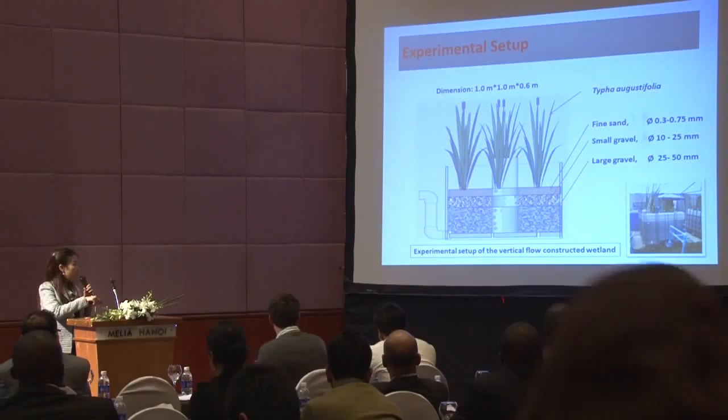This shows the experimental setup we have at AIT. We use plastic tanks, 1 meter by 1 meter, with about 60 centimeters of media. Inside the system, we put probes to measure DO concentration, pH, and ORP to monitor fluctuations in real time after feeding. From each layer, we also measure the percolate that passes through sand, small gravel, and large gravel at the bottom to see the fluctuation of each parameter.

This shows the sampling points and the points where we placed the probes to measure DO, ORP, and pH inside the system.

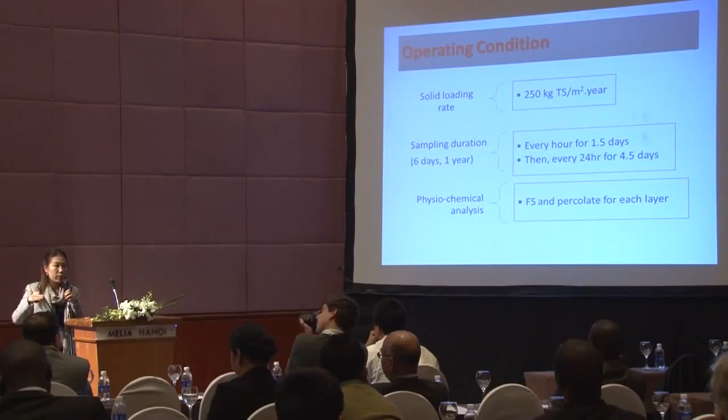For the operating conditions, we used 250 kilograms TS per square meter per year when feeding the system. After feeding, we took samples every hour for 1.5 days to observe nitrogen transformation, then measured daily until at least the 6th day of operation. We also measured parameters to calculate nitrogen transformation inside the system.

Organic nitrogen changes to ammonia by ammonification, which is about 4%. After that, ammonia also can change to nitrite and nitrate, about 3%. Then the remaining also can fall down to the bottom part, which is the gravel layer.

And also more or less the same, ammonification, nitrification, and also denitrification still can occur at the bottom parts, but maybe at a different percentage. Then for the remaining of all the nitrogen forms, it will fall out with the percolate. The overall process will take about 6 days because we feed once a week.

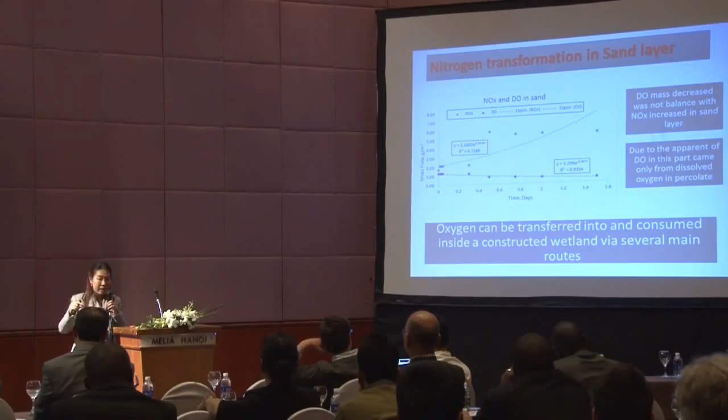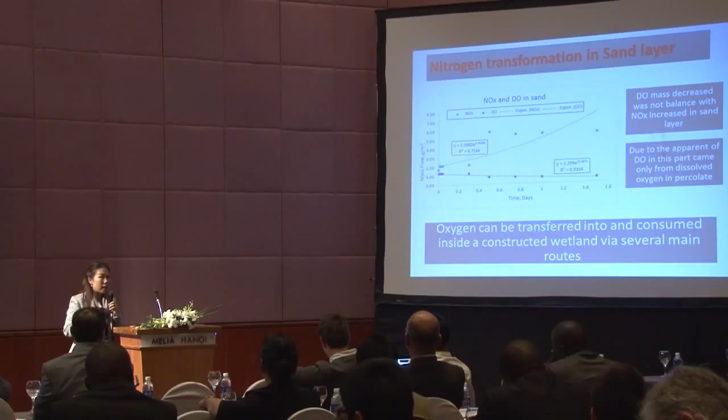If we compare the occurrence of nitrites and nitrates in the sand layer together with the DO concentration, we found that it's still not quite balanced, because from my hypothesis at first, I thought if we know the DO concentration, it may balance with the occurrence of nitrites and nitrates in the system. But after we measured, we found that the occurrence of nitrites and nitrates in the system is still higher than the concentration we can measure, about 2 to 3 times.

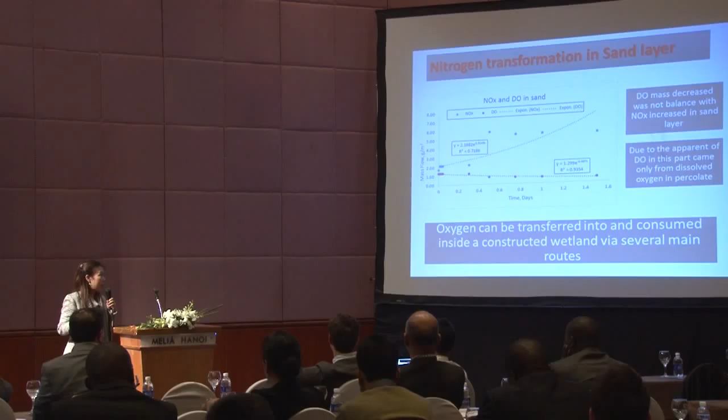This means that oxygen in the system may come from other sources, like from the plant root, and also can come from the air. This could be a topic for further study.

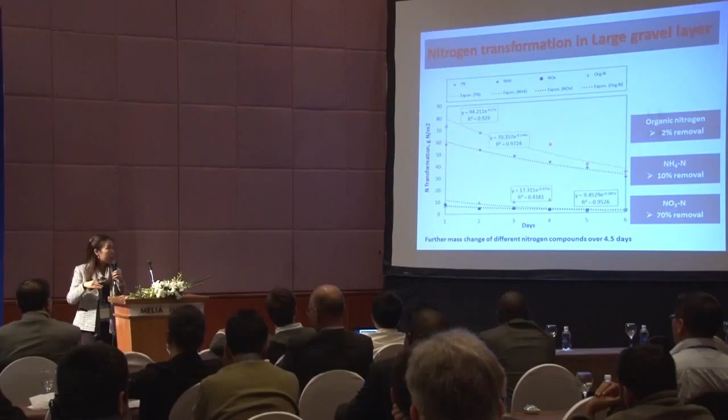For the small gravel layer, it's also more or less the same, but with not much reaction as in the sand layer. Just 2% of organic is removed at this level, and also 10% of ammonia is removed. The occurrence of nitrite and nitrate is also removed here under the denitrification reaction. Also for the bottom gravel layer, the remaining of every form is also removed here.

I would like to come to the conclusion. For the upper part, ammonia can transform by nitrification under aerobic condition, which we can confirm by the DO concentration in the system.

Based on my previous study, at that time I had not measured DO concentration yet, but for my study I also got a lot of questions about how nitrification can occur in the media, or inside the sand media. So I also measured DO concentration to confirm the reaction rate. And also within the sand layer itself, denitrification also can occur, because we can confirm this by the anaerobic conditions.

And then at the bottom part, both net reactions also can occur: nitrification and denitrification, because the oxygen also can come with the percolate that falls down from the fecal sludge and also from the sand filter layer, and then go down to the bottom part, and then the remaining oxygen can slightly cause nitrification and continue with denitrification according to the...

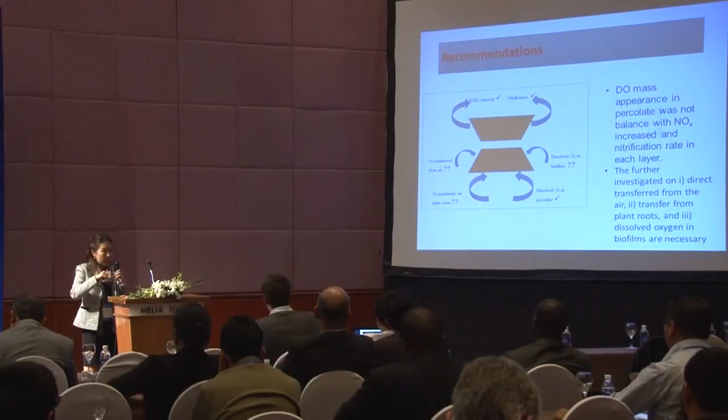As for my recommendation, right now we already know the DO concentration of oxygen within the percolate, and also we know the loading removal, which is how much oxygen is used, and also nitrification. But we still cannot clarify the oxygen transformation from the air to the system, and also dissolved oxygen in the biofilm surrounding the cell. And also oxygen transformation from the plant root. This will be the further study of this research. Okay, thank you very much.

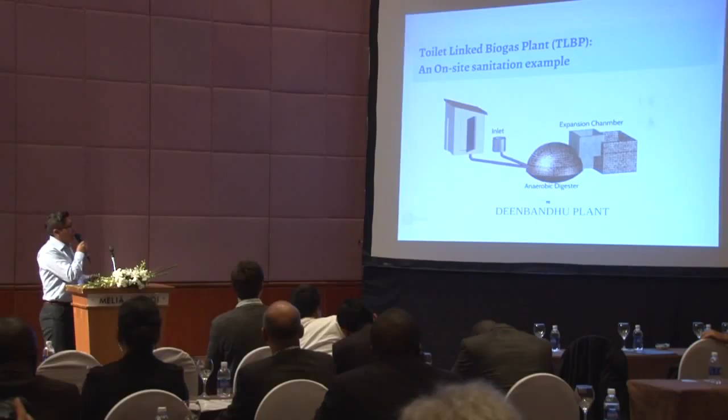But since the government and other institutions are implementing a lot of toilets, the next problem is: what are we going to do with the fecal sludge? In this specific case, what we did was link the toilet to this existing system. That's why it's called a toilet-linked biogas plant.

This system is quite good because it produces enough energy for cooking, and it's quite simple. The effluent of this system is also well appreciated because in rural India, the main activity for most people is agriculture, and they reuse the slurry in agriculture. But once they linked the toilet, the problem was that the effluent, the slurry, has a high concentration of pathogens. That's the main problem. This is a picture of how the system looks in the field.

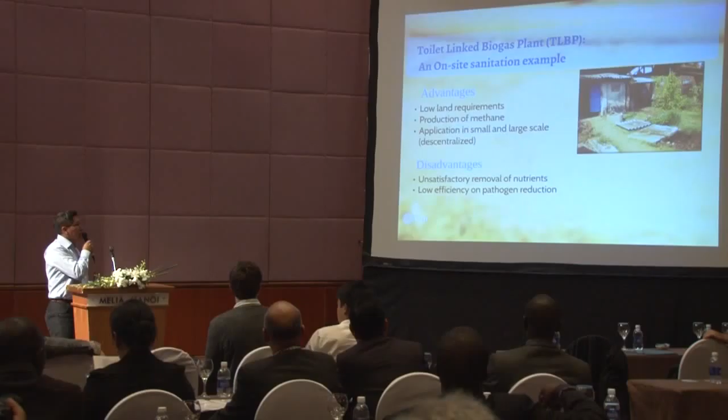You can see the inlet to feed the system; the digester is underground, and here's the effluent, and here's the toilet. The main advantages of this system: it has a low land requirement, it can be underground, it produces methane and biogas, and it can be applied at small and large scale. But the main disadvantage is the removal of pathogens, and also low removal of nutrients.

Also, very little was known about the characteristics of this product. That's why we did this research, to determine the characteristics of this effluent, and also proposed implementing sludge treatment wetlands to check if it's a good system, if we can remove pathogens, and what are the characteristics of the byproducts after this system.

We characterized the slurry and implemented eight pilot-scale experimental units. About the setup of the experimental unit, we selected two different species of plants.

The first one is called karka, it's a local species of Phragmites. The second one is called Napier Bajra hybrid grass, which was developed by the local university in India. The main use of this second plant is for feeding animals, cows.

This is how the experimental unit looks. As mentioned in previous experiments, we also included aeration pipes because the literature mentions it improves performance. We also used four different layers of sand and gravel, and a density of six plants per square meter.

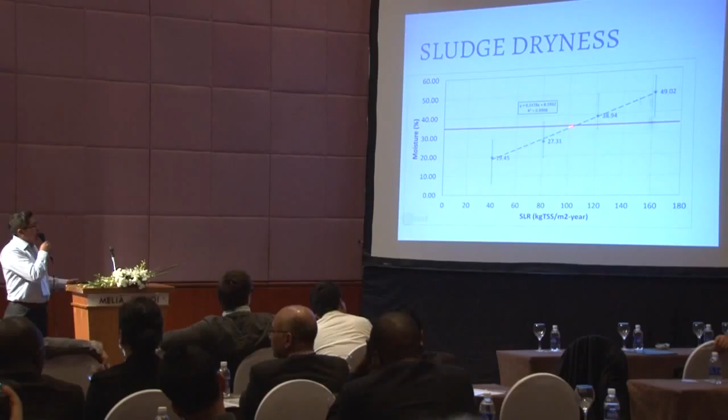We checked the sludge dryness. As you can see, we have results for 4 different loading rates, and there is a tendency of linear increase. But there is a recommendation for reusing the final product: the dried sludge should be around 35% moisture content. This is an indicator to say, okay, this is the recommended factor. We can assume that at least 100 kilograms of TS per square meter per year is the recommended loading rate.

We also checked the stabilization. You can see the influent was around almost 70%. It was reduced at different loading rates. At low loading rate, of course, there is more reduction, more stabilization of the product.

About the nutrients, this is the quality and amount of different components of nitrogen at different loading rates found in the experimental units. These values are similar to other materials like compost published in scientific papers.

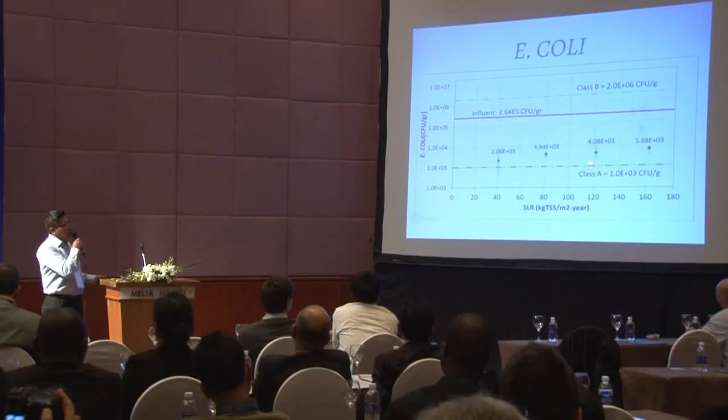About E. coli, this morning it was mentioned that it's not a very effective method for E. coli reduction. That's true. We have two classifications for reuse. Class A means if we are below class A, we can reuse the product without any measures for health problems. But if we are below class B, we can also reuse the product—we reach these values—but we need to take some measures in order to handle it using safe tools and materials.

About the water collected in the bottom, it's very important to measure the quantity of water. Why? Because of the evapotranspiration factor. That's why the dry bed or sludge treatment wetland can change—it's not the same design for everywhere. It depends a lot on the local conditions.

In this case, for example, the evapotranspiration is almost 12 millimeters per day. If we work with very low loading rates, we will see that the plants will start dying because they don't have enough water to grow and develop all their activities. We need at least 110 kilograms TSS per square meter per year to have enough water for the plants to do their job.

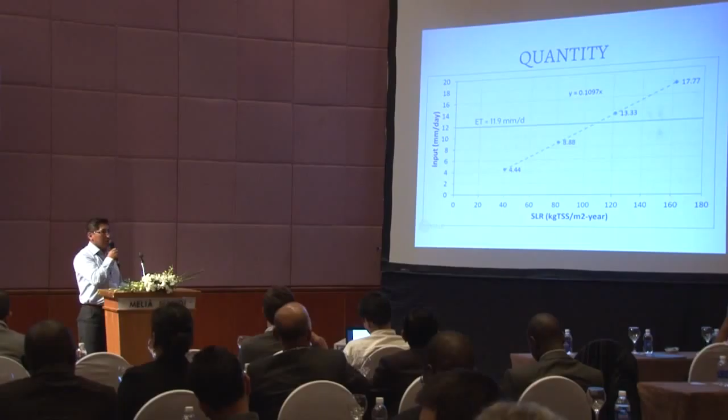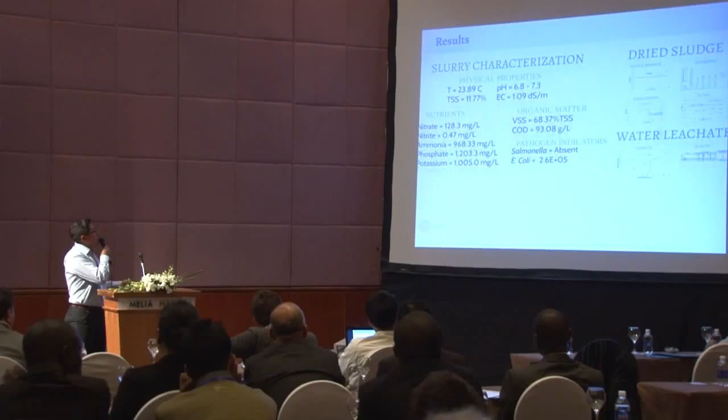Well, just to conclude, we have this toilet-linked biogas plant. It's a successful system implemented in India. It's fed with cow dung and the toilet daily, and it generates enough biogas for cooking every day. It also generates slurry, which is a very well appreciated product for reuse in agriculture.

We found that applying this technology, sludge treatment wetland or planted dry beds—it's just a question of nomenclature, I think—we have two products: the dried sludge accumulated in the top layer, and the leachate, which is collected in the bottom. Both of these products can be applied in agriculture.

They do that. And additionally, the plants—because we tested different plants and I think we can test a lot of varieties of plants. In this case, one of the species was specially developed for feeding cows. It's also possible to reuse it. Somehow, we can close the cycle by applying this technology.

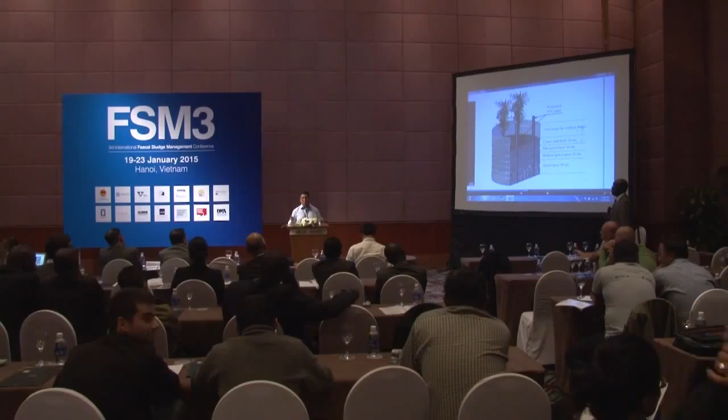So I asked, what is the C:N ratio in the reactor or the biogas? Carbon to nitrogen ratio - that would be a very good question. What I propose is you can put this answer as a panel discussion topic. Otherwise, we can use SuSanA. Thank you very much.

Thank you for the kind introduction. Thanks everyone for coming to my presentation. I'm presenting research results from Dakar, Senegal, part of a research collaboration between Sandec and the University of Cheikh Anta Diop in Dakar, with Mr. Seydou Niang, who is also here.

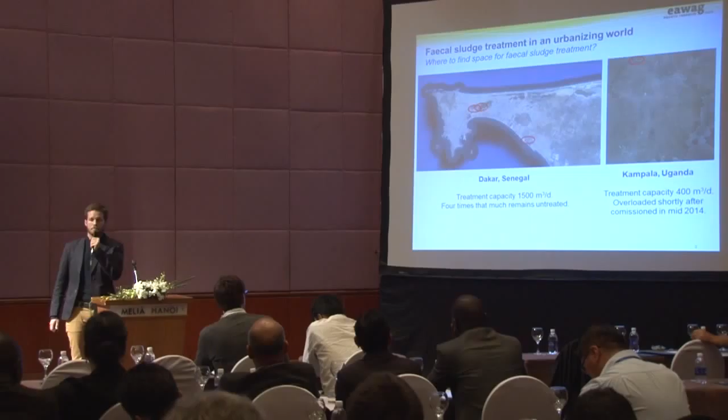Both treatment plants rely on sand drying beds to treat the fecal sludge. As you know, fecal sludge is mostly water, so one of the main steps when treating it is separating liquids and solids. Drying beds are commonly used worldwide. They have advantages of low operational costs and low capital costs, and benefit from the semi-arid climate in sub-Saharan Africa, but a big disadvantage is they need large drying spaces.

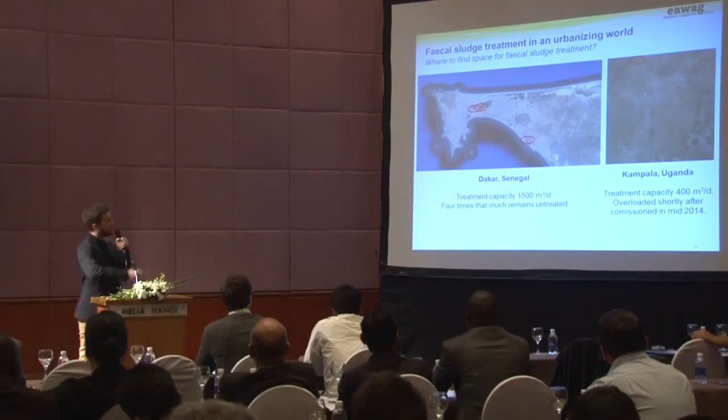So what we're looking at is ways to increase the drying footprint. As you can see in the top right picture, in Kampala treatment plants now tend to get located outside the city, which is a good idea in a way, but considering we're mostly transporting water around the city, it increases fecal sludge collection and transport costs, which then at the end get passed on to the household level.

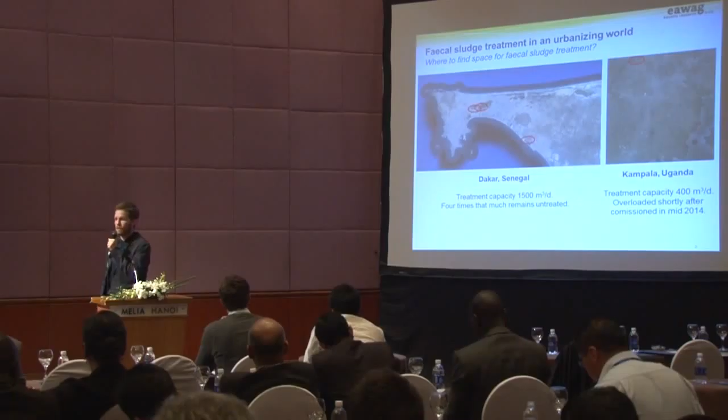So what we're looking at, if there are wastewater engineers here - I'm kind of a wastewater engineer trained in Germany - polyelectrolytes, organic polymers, and metal salts are used in wastewater treatment to increase dewatering properties of sludge. Sludge particles are usually negatively charged, and by adding these materials and mixing them with the sludge, these negative charges get overcome, and bigger floc particles build up, which are easier to dewater.

These conditioners are nice, but experience shows that using imported, expensive consumables for fecal sludge treatment is one reason why fecal sludge treatment plants in sub-Saharan Africa, and in other countries, are not sustainably working. There's a paper I recommend from my colleague Magalie Bassan on success and failure assessment of fecal sludge treatment technologies - we should learn more about why treatment technologies are working and why they're not.

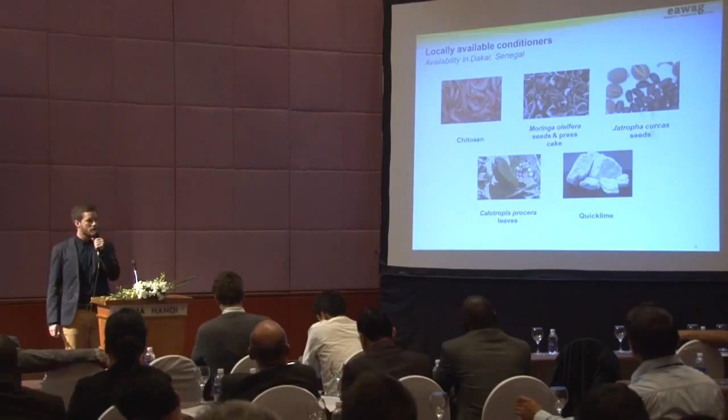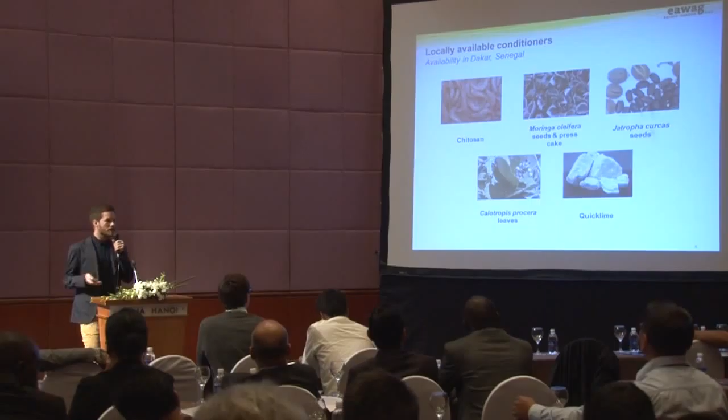Moringa oleifera is at the moment a bit of a hyped plant. In Europe you get it now as a tea. It's also produced as an oil. In Senegal it's also a popular food, and the leaves and seeds of the Moringa oleifera are eaten.

So these were the local conditioners we were looking at. To assess if these conditioners can really improve dewatering properties, we're conducting lab and bench scale experiments.

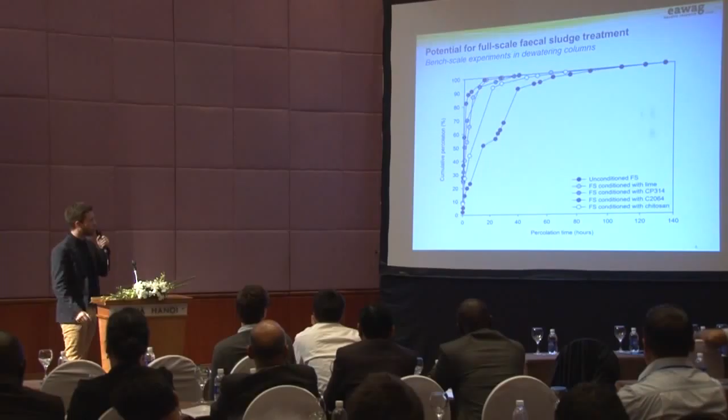This here shows a dewatering curve - how long did it take to dewater the percolated free water. The black filled circles show unconditioned sludge, and as you can see, the dewatering was faster when the sludge was conditioned with, in this case, lime and chitosan, compared also to these commercial conditioners. And as you can also see, lime and chitosan compare well with commercial conditioners.

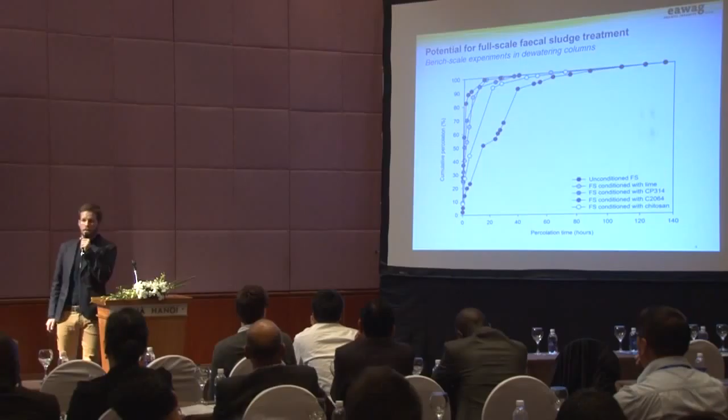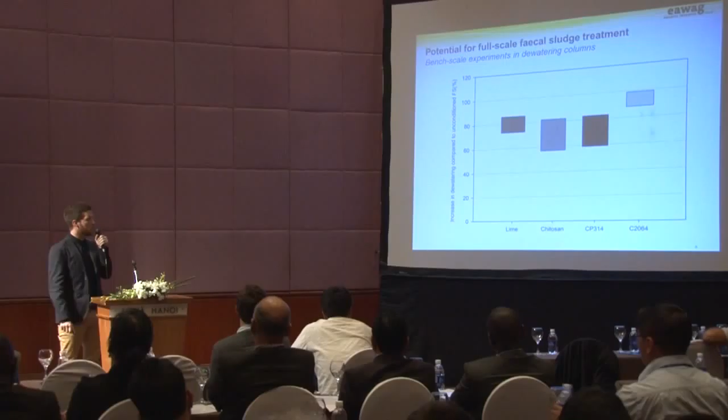In Dhaka, depending on the loading rate, the time it takes to dewater sludge on drying beds is usually between 2 to 9 days. So this time you can cut by 60% or more. But I think this also has implications not only for drying beds, but also for mechanical dewatering or for container-based solutions. So we're not only looking into drying beds.

Now, we didn't find the solution for fecal sludge treatment in this study. All the conditioners have advantages and disadvantages.

I had big discussions with him before I started the study, because he was saying you don't even have to look at Moringa oleifera because it's not going to be available, these seeds. And he was right. So listen to your supervisor sometimes also.

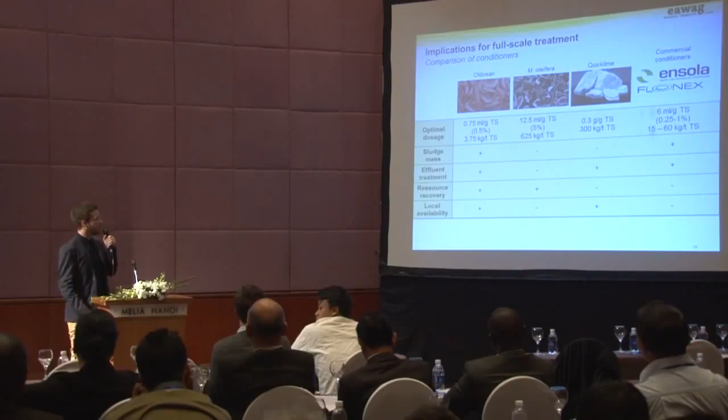As you can see on top, these are the different dosages required for conditioning - around 4 kilograms per ton total solids for chitosan, and 625 for Moringa oleifera. These quantities, for at least a centralized fecal sludge treatment in urban areas, talking from, like, above 300-400 cubics a day, this is not available at the moment.

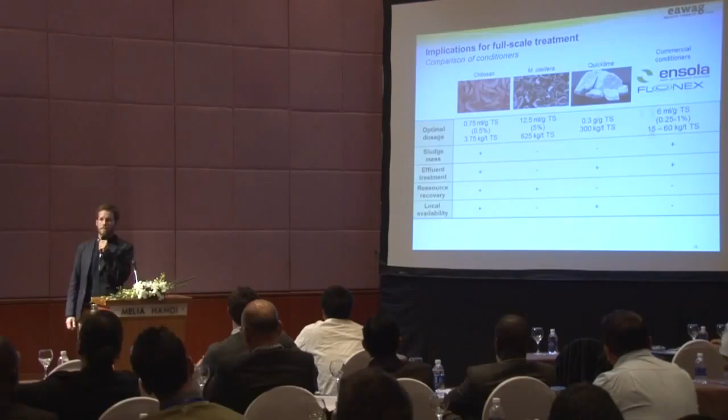If demand can be created, maybe it could be available in the future, but it's not available now. This was different for chitosan. In Dhaka, we did a market demand study or supply study of these shrimp shells, and there's enough shrimp shells available which are not used at the moment where chitosan could be processed from.

So if owners would say, okay, we're now using chitosan in our treatment processes, there could be a local company coming up and processing this waste stream into a conditioner.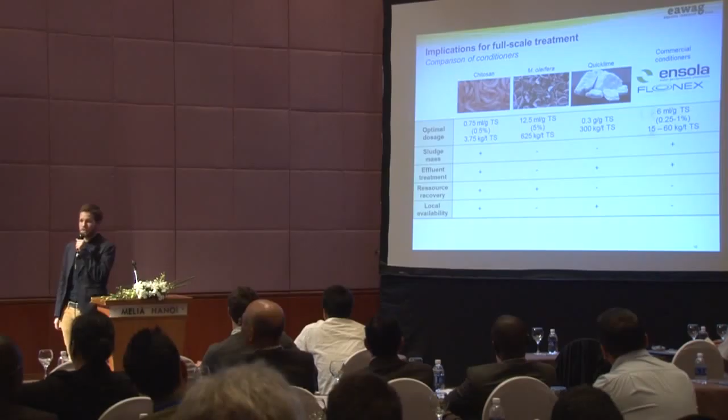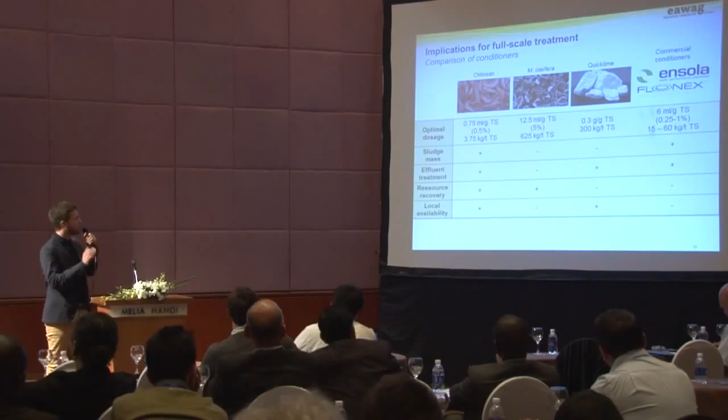Another point I want to make here is that quicklime and Moringa oleifera increase the sludge mass. You don't want to end up treating more sludge than necessary, which increases your costs. For Moringa oleifera, you could argue you're adding an organic material, so you increase maybe the properties of your treatment end product if you use it in

agriculture. But that's usually not the case for lime, which increases the ash content, and might be useful for some soils, but not for every. So it also has implications for resource recovery.

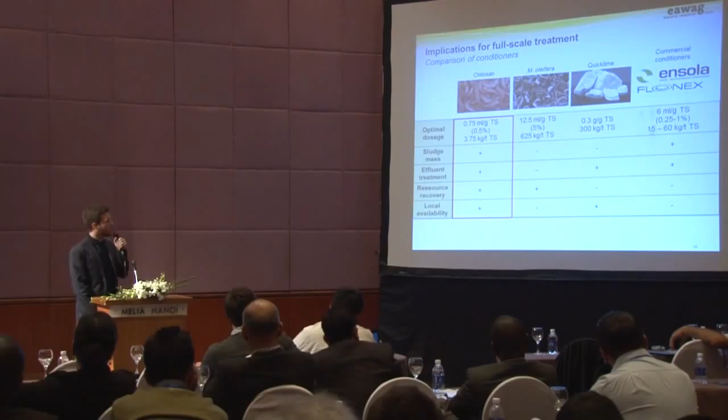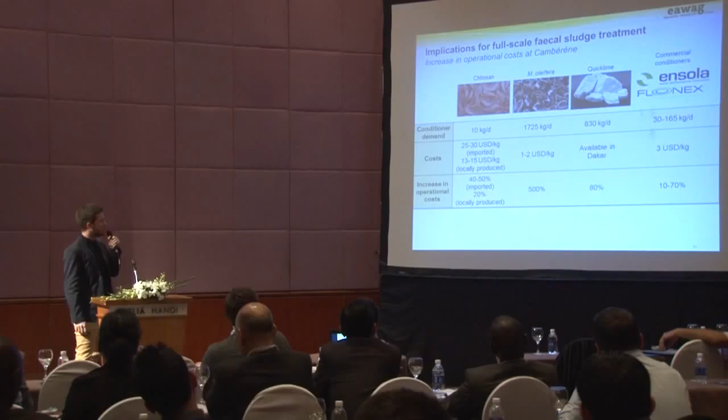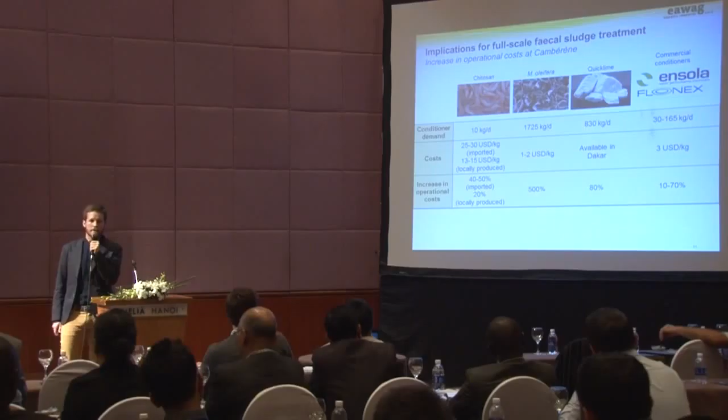In terms of costs, the lowest you could get would be a 20% increase in operational costs. So it's significant, but I think these numbers should be taken with care, as we don't really know so much about real treatment costs of Faecal Sludge treatment plants—that's also what we heard yesterday and today. I would like to thank our partners in Dakar for supporting the study, and especially the students, because they were the ones really doing the research in Dakar. Thank you for your attention.